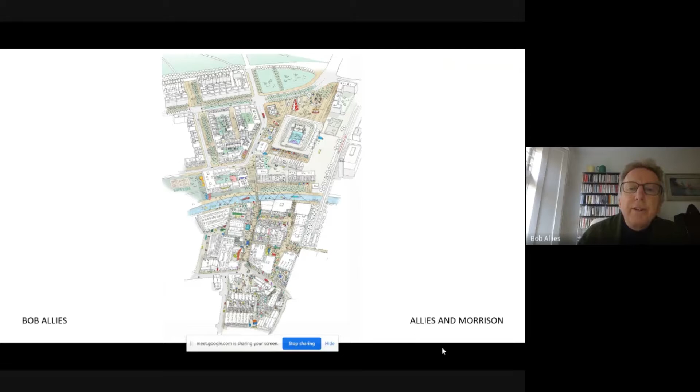And it was also a drawing about use and the sorts of activities that might go on there. Those three words, connections, uses, and scale, I've written out in another way for today's purposes, with three slogans which to me are very important issues to deal with when talking about trying to make really successful places.

Now, linking the Olympic site up was hugely important in the development of the master plan. We were interested in the way in which the Olympic Park, all that investment, could grow outwards and feed the areas adjacent to it.

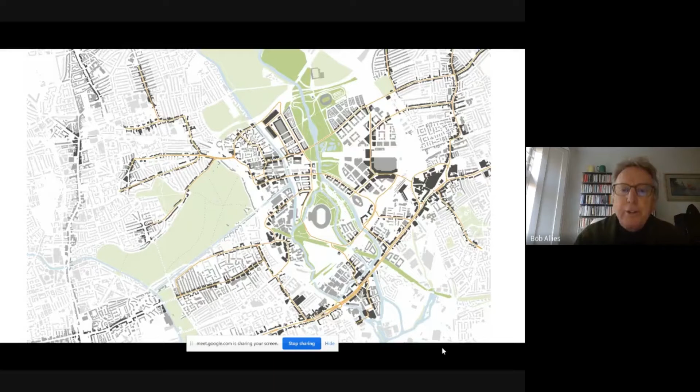So we did a lot of drawings to understand how people moved around the site when we began in 2000, and how they might move around it in the future. That simple idea of linking new development up with existing development is, I think, a hugely essential part of a way one thinks about place.

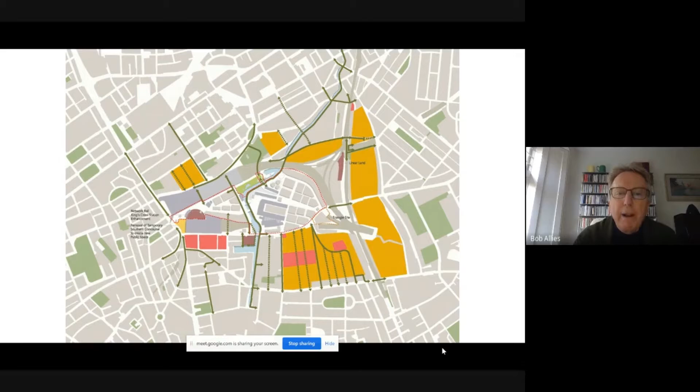That understanding then gets fed directly into the planning of the new site we're working with, as a kind of underpinning framework of capillaries for movement, which then inform the way the place evolves.

At King's Cross, I think particularly, one is very aware of the way, because it's so well connected now into the city that surrounds it, it has been much more successful than one might have imagined in attracting the local community to come in and use the space every day in a very informal way, and enjoy what the public realm can offer them as a location which has really enriched the lives of what are in fact relatively deprived communities living in the areas immediately adjacent to the site.

And what's fascinating is that, of course, it's wonderful on a lovely sunny day, but even on a bleak grey day, a place like this can still have a role in contributing to the lives of the people who live round about it.

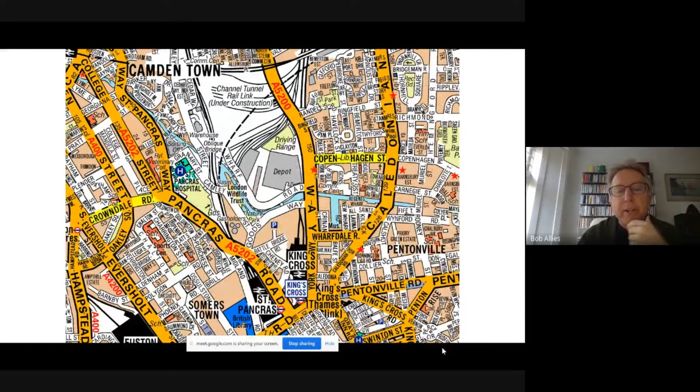When we were working on the project, we had to try very hard to communicate this aspiration. One thing we did was take the old London A to Z map. We don't really use it anymore, but we did then, and looked at how King's Cross appeared in that map, then made it clear that in the master plan for King's Cross, we were simply growing the city into it. This wasn't an isolated place; it was absolutely connected back into its neighbouring communities.

The other thing which I think was important at King's Cross was thinking about all the uses that might go on in it. Yes, the majority are residential and office uses, but we looked very carefully at the ground floors of all the buildings and how other uses might be distributed, both during the day and equally during the night, so we could get a kind of understanding of that.

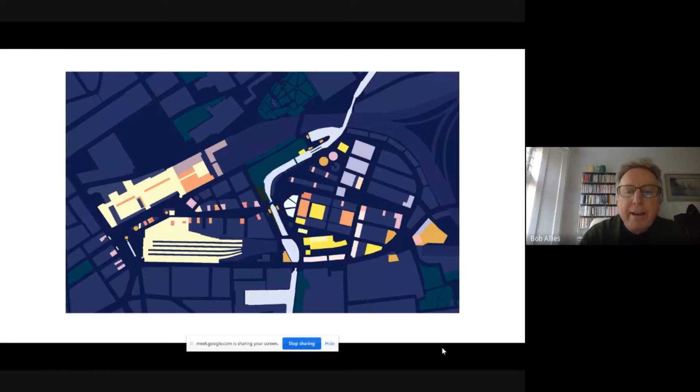One of the hugely important moments at King's Cross was when our client, Argent, agreed with the University of the Arts London, Central Saint Martins, the art college, that it might move onto the site. Their arrival immediately changed the character of the place and the degree to which people wanted to be there.

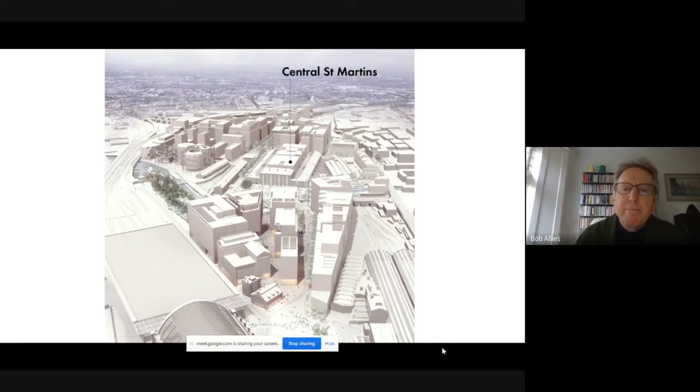And I think, again, that's a really important aspect of these projects: it's wrong to see them as a single use or one type of place. It's much more enriching to see them as a multiplicity of different uses.

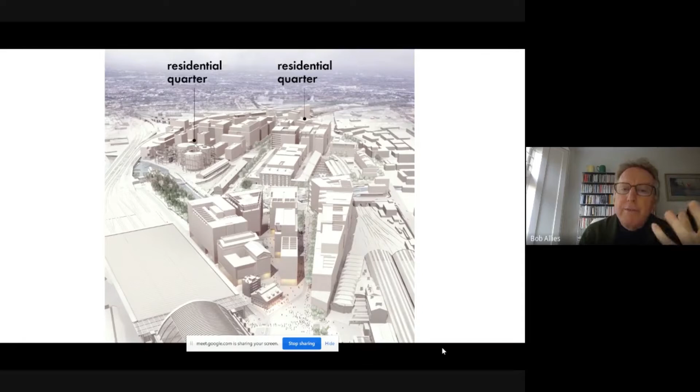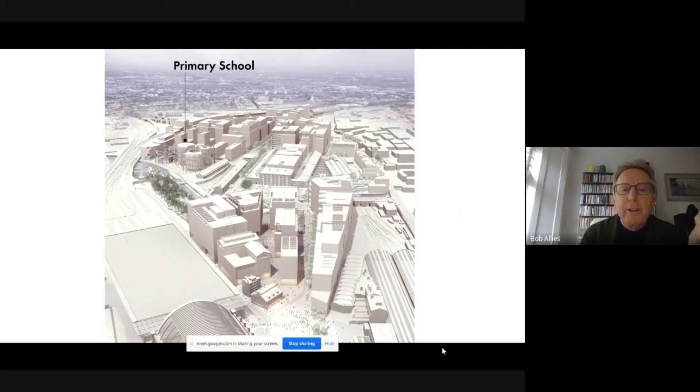At King's Cross, what's been very interesting is to see the way in which within these essentially residential or office areas, we've tried to achieve, and particularly Argent have tried to push the whole time, the drawing in of other uses, which all the time begin to enrich the place and ultimately make it a place that more and more people want to both work in or live in, but also want to go and visit.

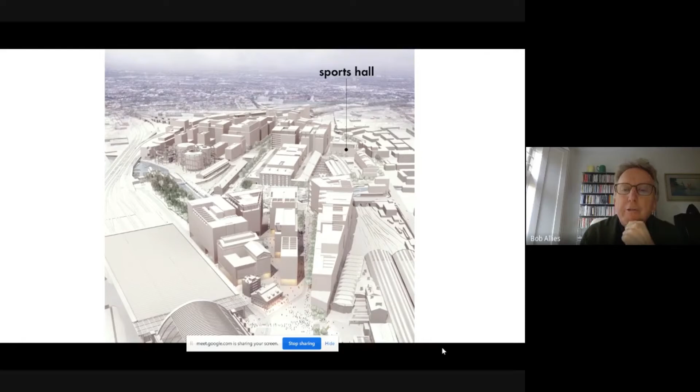That change for us as architects and master planners changed our view about these projects, really realizing that in the end, the greater the mix of uses we were able to introduce into the site, the better it was always going to be.

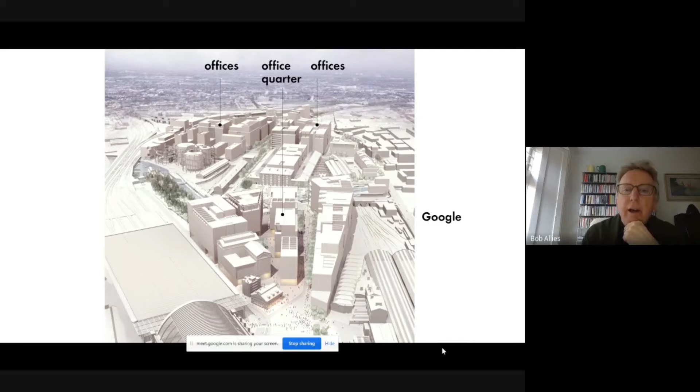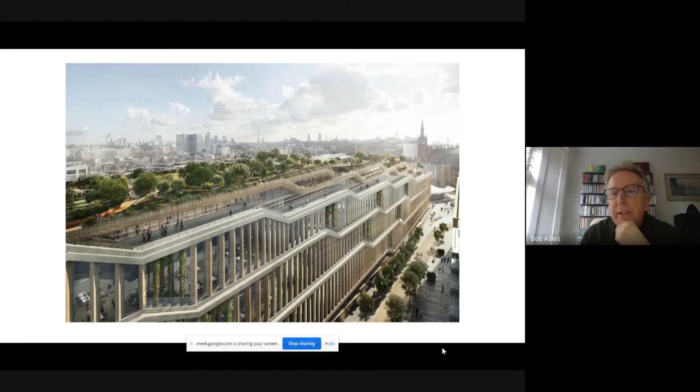That process has carried on all the way through, with the last big change in the scheme being the decision that Google took to move into the site and build a building, now well underway, designed by Thomas Heatherwick and Big, the Danish architects led by Bjarke Ingels. It seems completely obvious now, but it's fascinating to remind oneself that this is actually a big change.

Really what we're now doing is trying to take almost the opposite view again. We're seeing the benefits of mixing.

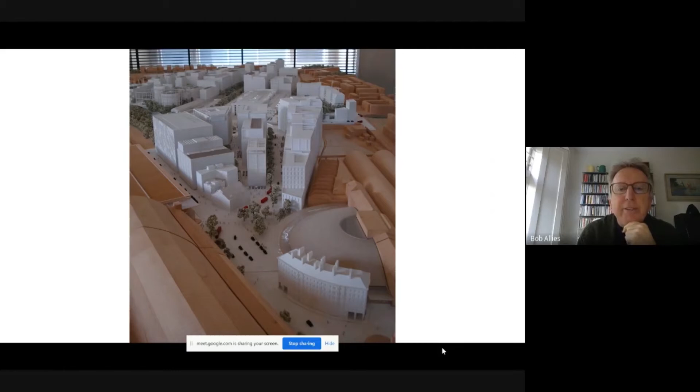We wanted to try and do the same thing at King's Cross, and this is a big model we made of King's Cross at a certain point in the project, where we were trying to talk with the planners about how closely we could build the buildings together and whether we all believed in terms of the scale of the spaces. That we've now built out.

I think when you walk around it now, one of the strongest senses you have, particularly in this southern part of the site, is this same sense of atmosphere that the buildings begin to generate, and the benefits we're gaining from building buildings quite close together, closer together than everybody thought might have been a good idea. But I think it is what is proving successful about King's Cross, and is a lesson we should learn as we move around and look at other similar projects elsewhere.

Certainly we're trying now in our other master plans to think hard about the way buildings come together, and think hard about the kind of character of place that we can begin to construct through these sorts of relationships.

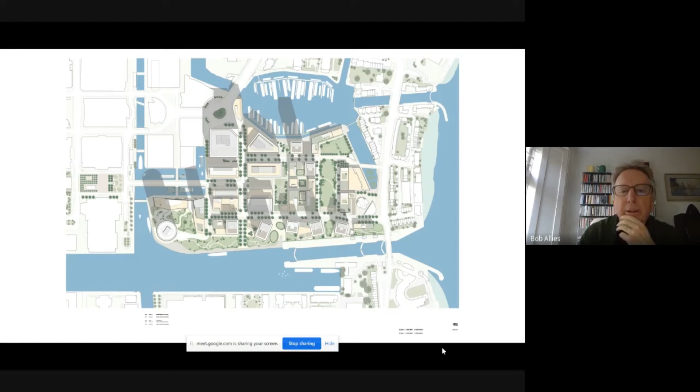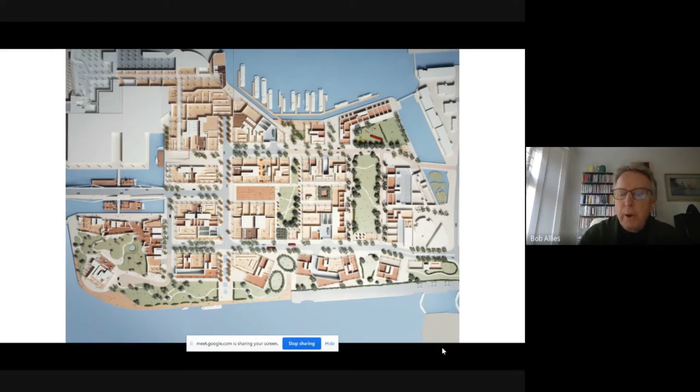that go into it. It's much more diverse than Canary Wharf. And of course, in the end, the buildings are very important. But curiously, the models we made of Wood Wharf are actually much more about the ground plane, about the landscapes between the buildings, and the way each individual building has to contribute to the spaces round about. This is a model made before we had architects for all the buildings, but it was trying to describe to designers how we expected their buildings to contribute to the way the public spaces are going to work. So it's a kind of intricate model, but really thinking about these relationships.

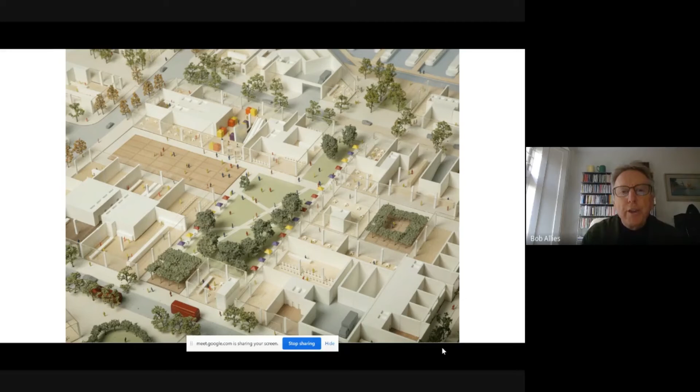I suppose that's, in the end, the important thing to say here: a kind of urban plan or master plan can go only so far. In the end, it requires us as architects, as people building individual buildings, to work very hard to make sure our buildings make the contribution they need to make back towards the public space we're designing.

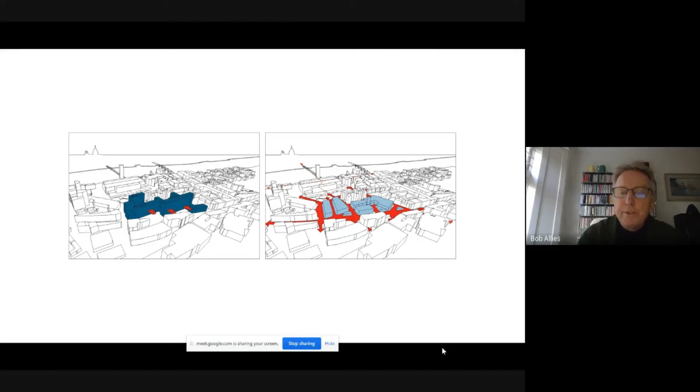In our scheme for the replacement of those two big slabs, which were a complete barrier to north-south movement, our buildings began to provide many more opportunities to move north-south. So you could improve the connections back to the river, and begin to generate active public spaces, but always spaces which are actually on routes, so they're animated by the way people can move through the city. They're connected back in all the time. And that route we've made between the new buildings at Bankside does indeed go through the Tate and across the bridge and into the